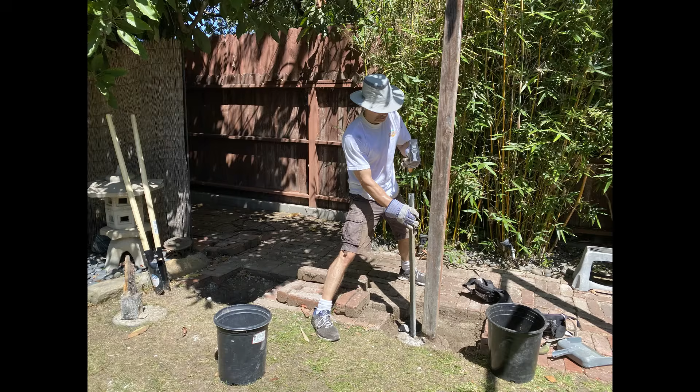Anyway, I then spent 4 solid days, and my contractor spent another day, just breaking up and removing the concrete from my original footings. Trust me that you don't want to do that if you don't have to. It's much better to build it right the first time.

So, I'm going to give you the advice that I wish someone had given me. There are a couple of good ways to build the uprights, and a couple of bad ways, which I'll explain.

Now, this is not going to be a step-by-step tutorial of how to build one of these things. And if you're not an expert in this kind of thing, I would recommend hiring a contractor or handyman to help you. Anyway, I'm going to first describe my original apparatus, then I'll describe my new and improved one.

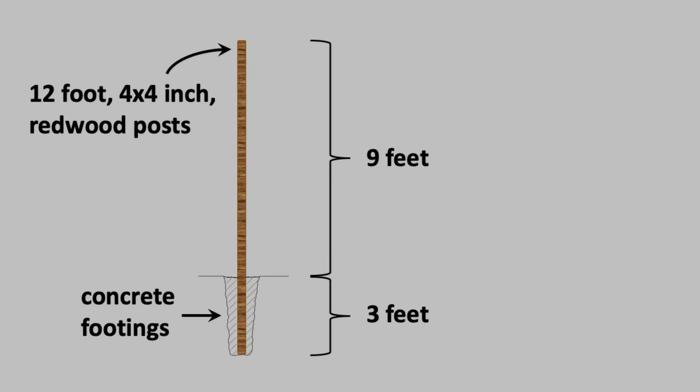My apparatus has 4 uprights and forms a 90-degree angle. The first time I built this, I decided to use 4x4 redwood posts. The posts were 12 feet long and the original height was about 9 feet, so the depth of the concrete footings was 3 feet. And of course, the wood posts sat at the bottom of the holes.

I thought that the 90-degree angle would make the whole thing solid enough that I could swing on the pull-up bar, but in fact, it was wobbly as hell. I tried a kip way back in 2009 when I first built it, and it was scary. The whole thing moved way too much. I decided right then that it wasn't a good idea to swing even that much on it.

If I were going to build another one of these things out of wood, I would use thicker posts, at least 6x6. So, hopefully everybody knows that if you put untreated wood directly into the ground, it will quickly rot away.

Your pull-up bar would only be stable for a couple of years. You may not be aware, as I was not, that if you put wood into concrete at ground level, it will also rot away fairly quickly, especially if there's a thin layer of dirt over the concrete. Like I said, my original redwood uprights essentially rotted away in about 10 years.

I should also mention that pressure-treated wood will last longer. I decided not to use it because my understanding was that poisons like copper and arsenic would leach out of the wood. From what I've read recently, most modern pressure-treated wood is less toxic than it used to be, so you can make your own decision. Most information online says you can expect it to last at least 20 years in dirt. It might last longer in concrete, but I've read that with a thin layer of dirt on top, it will rot away quicker, possibly only lasting 10 years.

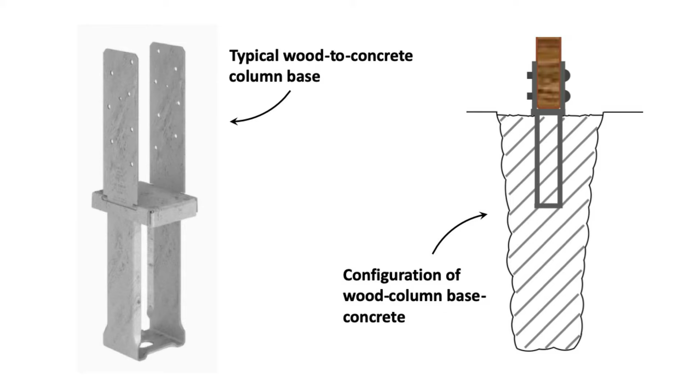But I have good news. There's a really good solution to this. If you're going to use wood posts, you can use a wood-to-concrete column base, like this one here. We use these on the wooden posts that hold up a pergola in our backyard. The wood sits on the metal base, above the ground, while the lower metal section goes into the concrete. This forms a connection that's just as good as if the wood post went all the way to the bottom of the concrete. As long as the wood isn't touching the dirt, it may not rot away in your lifetime, as long as you coat it with wood sealer every so often.

So you can use wood posts, but don't put the wood into dirt or concrete — put metal into the concrete instead. I haven't tried it, but I'm pretty sure that 6x6 wood posts with metal column bases will be both strong and durable enough for just about anybody.

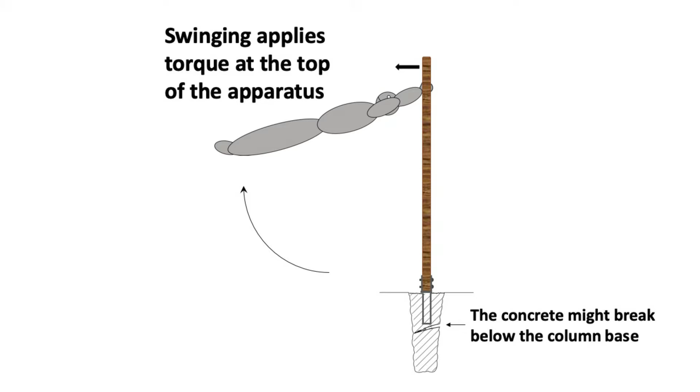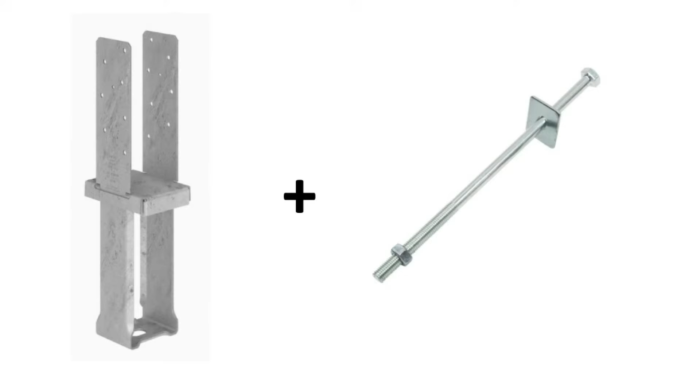Now that I think about it, this is a different situation than a normal load-bearing post. If you swing at all, you'll apply a lot of torque on the pull-up bar and could crack the concrete. So if I were doing this, I would try to find a column base where the metal part projects much further down. And if I couldn't find one long enough, I'd get one like this and attach a long bolt to the bottom so it goes down to the bottom of the hole.

Okay, so let's talk about my setup. I'm pretty sure this is the strongest and most durable way to build one of these. These are 4x4, 1/4-inch thick steel tubes or posts. They're the same size as 4x4 wood posts, which means this is actually about 3.5 inches.

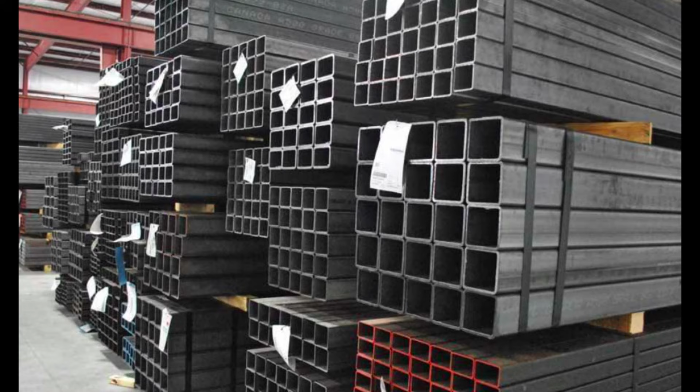Like the custom bars, this is the sort of thing most people don't think of. You can't buy this kind of thing at Home Depot — it's only sold at metal supply shops. Again, any big city will have several of these. This type of steel tubing is sold in 20-foot lengths. I needed 4 posts that were each 14 feet long, so I had no choice but to buy 4 20-foot pieces. It cost about $600.

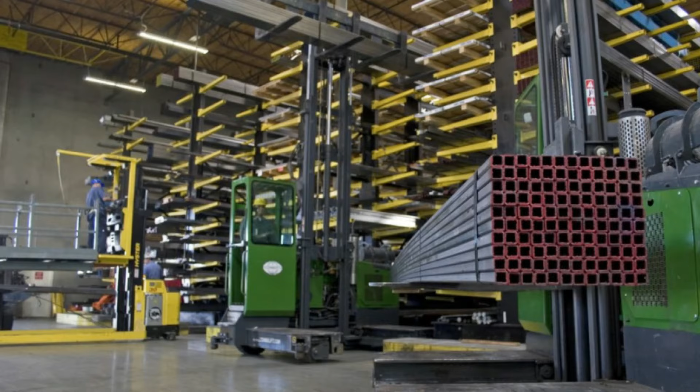They come as raw steel, so you have to galvanize them or apply some sort of finish. In my case, I had them powder-coated a color as close to redwood as possible, to fit the design criteria of my wife, who was in charge of aesthetics. The cutting and powder coating cost another $200 or so. My understanding is that the powder coating also protects the steel from rusting, although it's probably not as good as galvanizing.

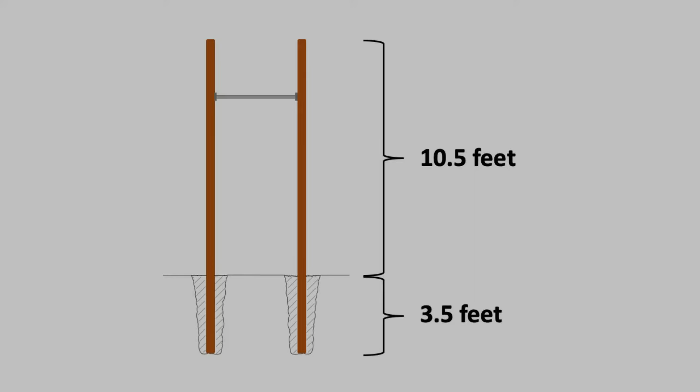It seems like there's a general consensus that you need about 1/4 of the total length of load-bearing posts to be in the ground. I decided on 14-foot posts with about 3.5 feet in the ground, so I dug holes a little over 3.5 feet deep and maybe 18 inches wide at the top. As I said before, this is not a step-by-step tutorial of how to construct one of these.

This is not a do-it-yourself project. If you're going to build one of these out of metal, you will need expert assistance — you will need to hire a contractor or someone extremely good at general construction, and it will require at least 2 people. The metal is heavy: the posts weigh 10 pounds per foot, so the uprights weigh 140 pounds each.

It was very difficult for the two of us, my contractor and I, to get the posts into the holes and then into the exact right position. We felt very fortunate that neither one of us was crushed or had a hernia.

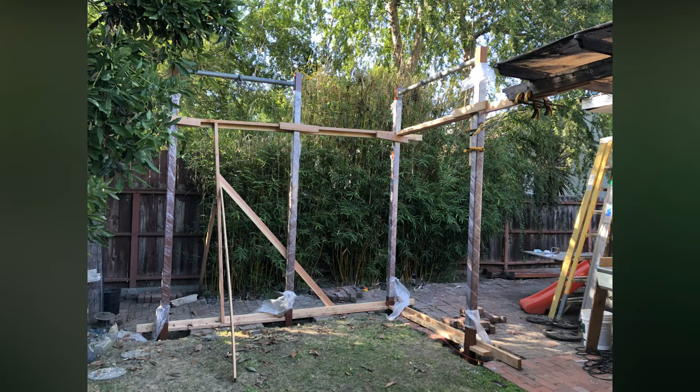My contractor constructed bracing for the uprights out of 2x4s and clamps, and he's expert at getting things perfectly straight and level with exact 90-degree angles, even when things are so heavy that you can barely move them.

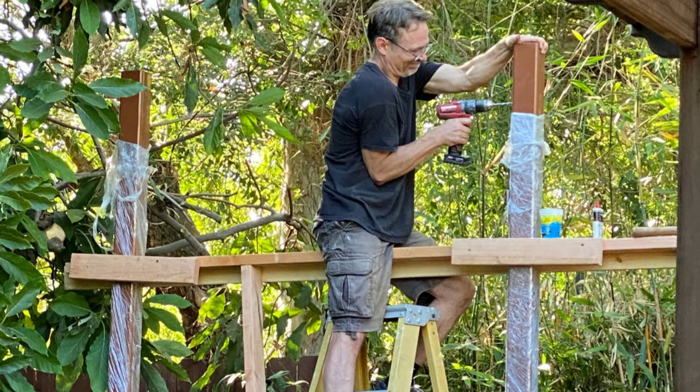I wanted to use my original bars, which were intended to be screwed into wood. The metal plates just have holes for screws. So we drilled holes into the metal uprights using cobalt drill bits, then cut threads with a tap and die. The bars are screwed into the uprights with galvanized metal screws.

Now, I'm deliberately not trying to describe exactly how we did all this, partly because I don't remember, and partly because I really feel like you need some sort of construction professional to oversee this operation, especially if you have metal uprights. Anyway, aside from the hole digging, it only took two days to do the whole job.

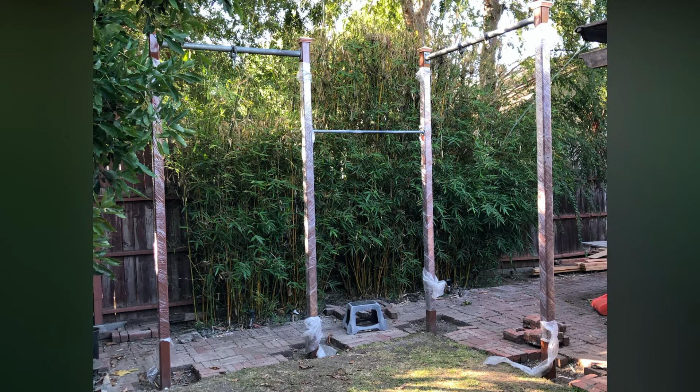My contractor and I worked one very long day and got the job mostly done. By the end of that first day, the uprights were set perfectly in place and the bars were mostly attached. Of course, you need the whole thing to be solid and set perfectly in place before you pour the concrete. My contractor poured the concrete the next day.

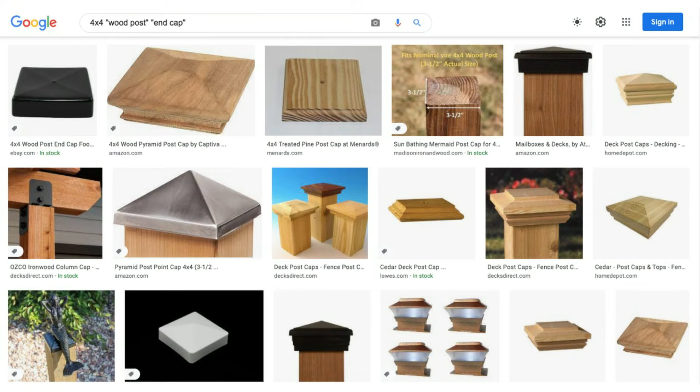And one more important thing about metal uprights: you need to put some sort of end cap on the top, otherwise water will get in and the steel will eventually rust. They make end caps for 4x4 wood posts, and since these have the exact same dimensions, you can easily find end caps that will fit. My end caps are made of copper.

If you were just building a single pull-up bar, meaning only having two uprights and one bar, it would probably be possible for two highly motivated people to do the whole job in one day. So that's about it. I'll give a quick recap with diagrams to summarize everything.

For the bar itself, the strongest option is a solid steel bar. You should be able to have a custom bar built at a local metal shop. If you build a custom bar, you can get whatever length or diameter that you want. If it's galvanized solid steel, it will never bend and it'll last longer than you will.

The easier and less expensive option would be to use threaded pipe, which can be purchased at most hardware stores. That's still quite strong and will make for a very durable pull-up bar.

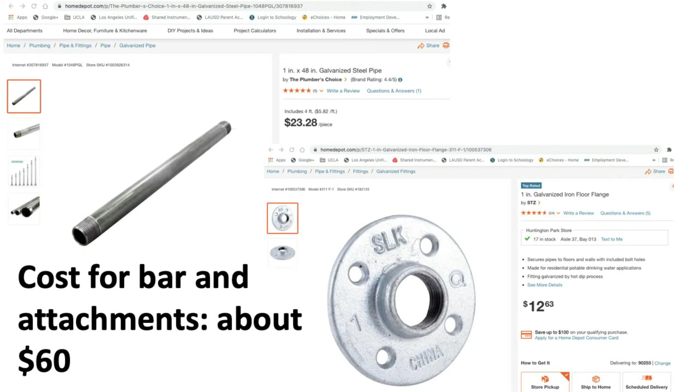For the uprights, metal is the strongest option. You can buy metal tubing or posts in various dimensions at a metal supply shop. The pull-up bar can be attached to the metal uprights by metal screws or bolts. You could even weld the bar to the uprights.

The easier and less expensive option would be to use 6x6 wooden posts. If you go with wood, use wood-to-concrete column bases so that the wood doesn't go into the concrete or even touch the dirt. The wood should be strong and resistant to rot, something like redwood or pressure-treated wood.

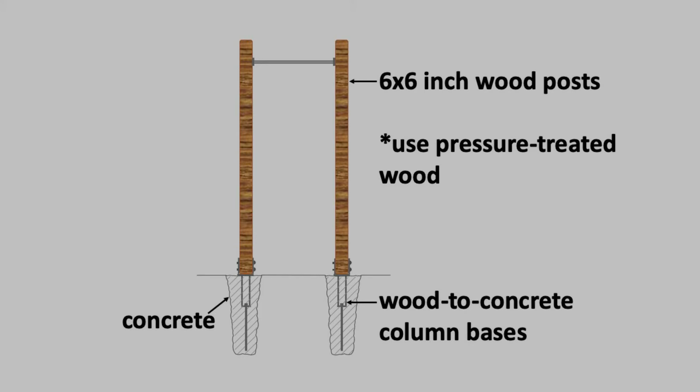You can decide how high you want the bar to be. I wouldn't go lower than about 7.5 feet, but of course it depends on how tall you are.

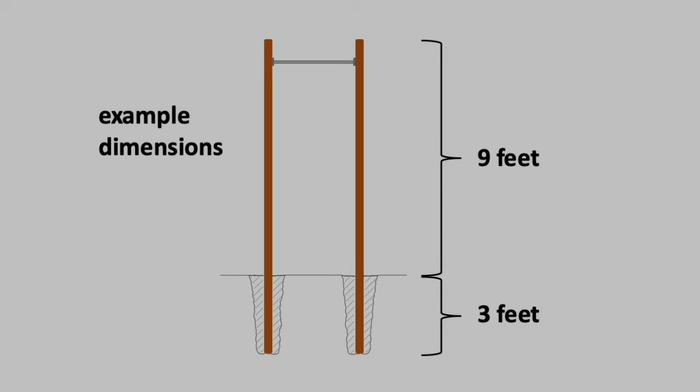It's a good rule of thumb to make the concrete footings one-quarter the length of the entire upright, including the part underground, as shown in the diagrams. Or, to put it another way, the depth of the footings should be about one-third the length of the above-ground portion of the uprights. I strongly recommend concrete for the footings.

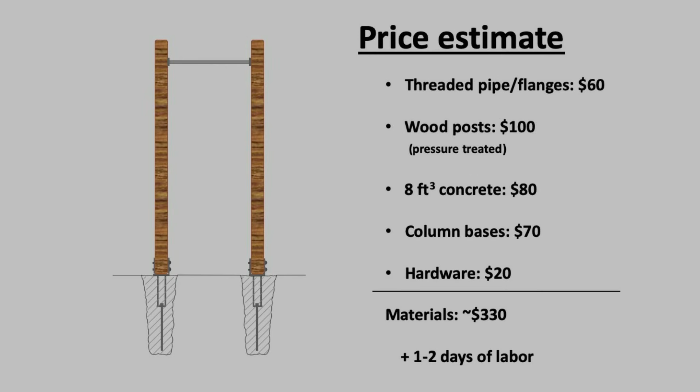I don't think that just dirt would provide enough stability for a pull-up bar.

I realize that not everyone has a backyard in which to construct one of these things. I also have a full workout setup in my house, despite having a very small house, and a wife who will not allow any piece of workout equipment to be visible when it's not in use. So, in an upcoming video, I'm going to talk about ideas for a workout setup inside your house or apartment when you only have a very small space to work with.